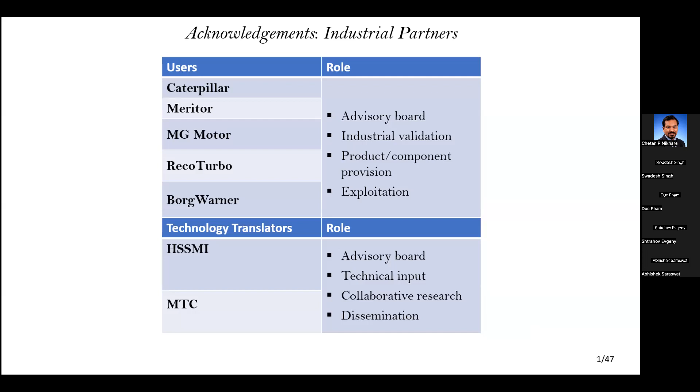The presentation is very simple. It's divided into 3 parts. The main part is the middle one. The first part is only to introduce what we mean by remanufacturing for those of you who are not in the area, and also what we mean by smart remanufacturing. Then I will describe robotic disassembly and our research in this area, which is part of the AutoReman project. Auto is autonomous, Reman is remanufacturing. So that's the end goal of the project, to achieve autonomous remanufacturing. Then a very quick conclusion to the presentation.

So what is remanufacturing? There are many definitions, but we follow the standard definition, which is from British Standard, and it is defined as the process of returning a product to at least its original performance with a warranty that is equivalent to or better than that of the newly manufactured product. So I have underlined the keywords there: warranty that is equivalent to or better than the newly manufactured product.

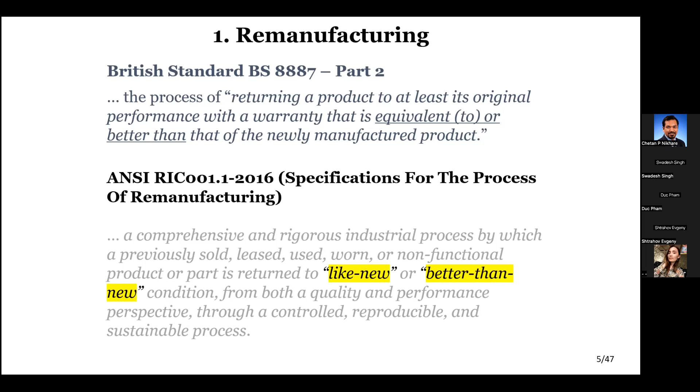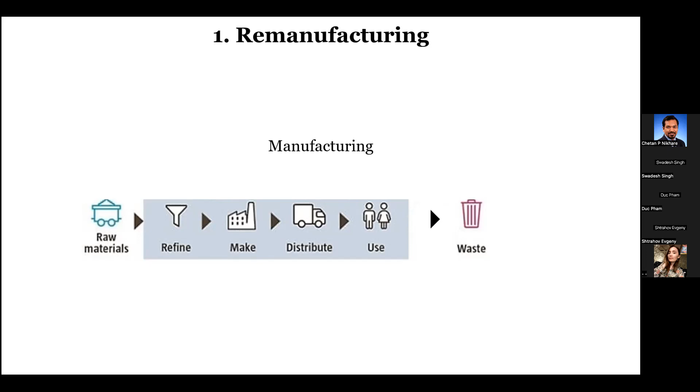So we are all familiar with manufacturing, which is the process of converting raw materials into the product that we use and then we dispose of. So at the end of the product's life, we throw it away. That is conventional manufacturing. Remanufacturing is part of a circular economy where the used product is returned to its original condition or better than original condition, as I mentioned before. There are other loops in the circular economy, but remanufacturing is one of the loops, and it is an inner loop.

So we are familiar with recycling, which is the outermost, and it returns the used product to raw materials. Remanufacturing returns the used product to a new product. So it becomes a new product at the end. And then we have refurbishing, we have reuse and repair.

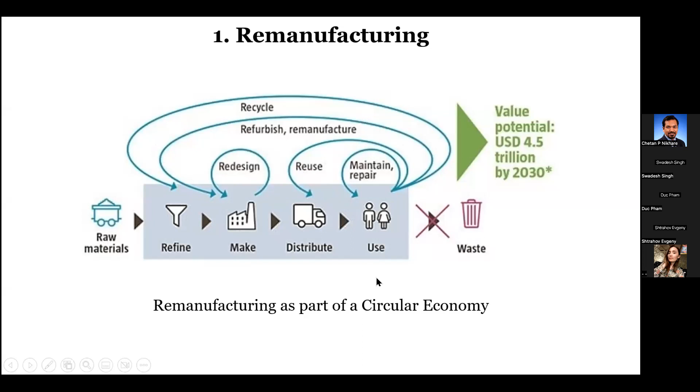Now, looking at the various Re's, repair gives you a warranty, which is okay, but not as good as other Re's. And it does not require as much work as other Re's. Renovating, refurbishing requires a bit more work, or sometimes quite a lot more work, and gives you a longer warranty. Reconditioning, further work and longer warranty. Remanufacturing gives the original warranty, or even better than original warranty, but it requires a lot of work. So this is how remanufacturing is positioned relative to the other Re processes.

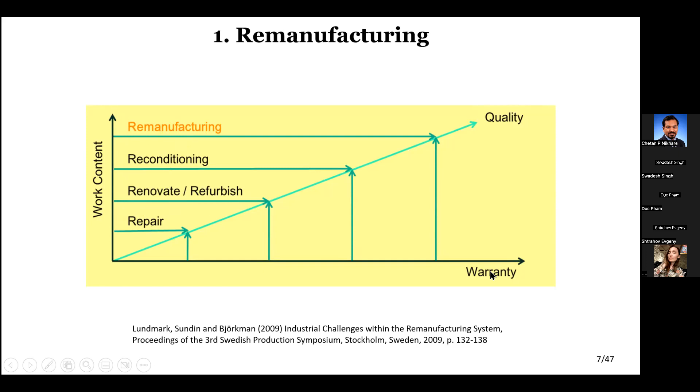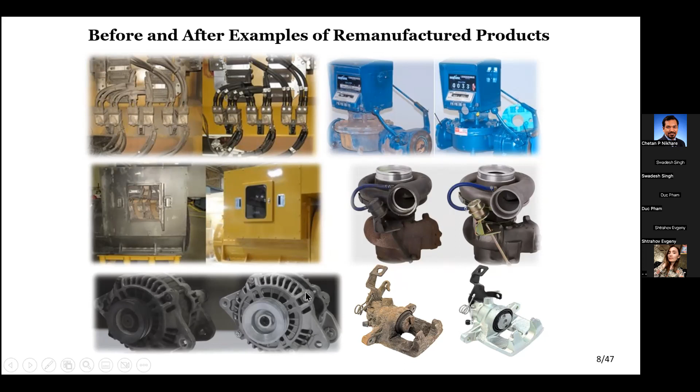So here are some examples of products before and after remanufacture. So this is part of a generator, and before remanufacture it looks old and disused, and then after remanufacture it looks brand new. The same with this flow meter before remanufacture, after; this turbocharger before, after; these brake calipers before and after; this alternator before and after. You can see that externally the products look as new, and internally they also behave like new.

Now, why do we want to remanufacture? Now, most of you are material scientists and engineers. You know about the scarcity of materials. Certainly, quite a few materials are very scarce. And it is very important that we don't waste them, that we are able to reuse them. So remanufacture saves a lot of material. So in the case of this turbocharger, remanufacturing saves 98% of materials. You can use 98% of the materials from a turbocharger to produce a remanufactured turbocharger. In the case of this motor, it saves 88% of materials.

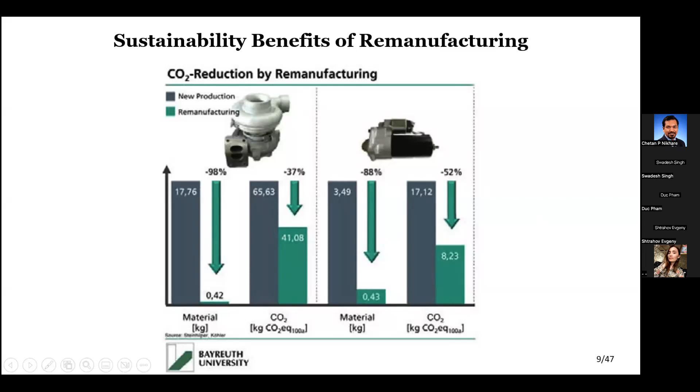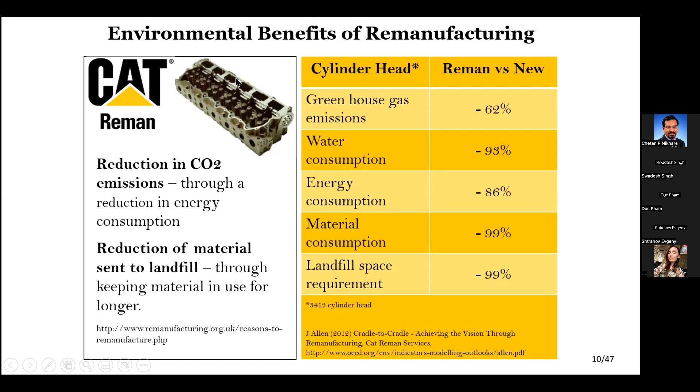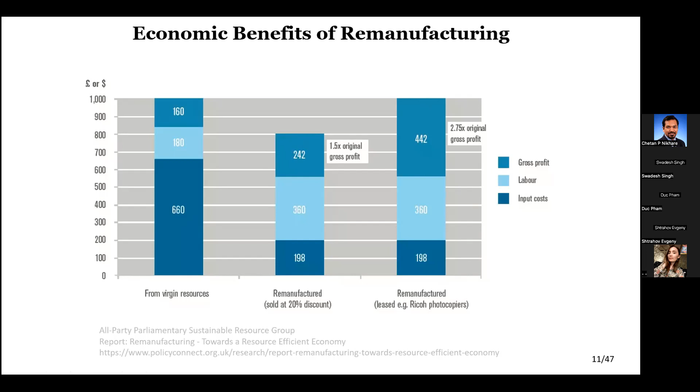So for a manufacturer, it makes a lot of sense. You make more profit. For a user, it makes a lot of sense. You save money, 20%. So everybody wins. The environment wins because we don't emit so much carbon dioxide, greenhouse gases. We don't waste resources. Manufacturers win, as you can see. They make a lot more profit, and users also win. Consumers also win. So it is win-win-win. Now, this is a straightforward sale situation. If the product is leased, the manufacturer makes even more profit, as you can see here. So we see that remanufacturing has environmental, sustainability, and economic benefits.

Remanufacturing also has some challenges. The key challenge is uncertainties, and I will explain to you what they mean. So uncertainties in remanufacturing are to do with supply uncertainties. You don't know what quality of the product you get when you start remanufacturing. So a used product can be quite good or can be very, very poor. So there is quality uncertainty there in the input of the remanufacturing process. The quantities, you don't know how many will be available and when. The quantity and timing are uncertain. Because of those uncertainties, there are operational uncertainties. So you don't know what processing is required for a used product. Some will require a lot of processing, some will require much less processing. Therefore, also the time involved in remanufacturing a product is uncertain.

There are demand uncertainties. At the moment, people are not yet familiar with remanufactured products. They still have queries about the quality of the products—by that, I mean users, consumers. So we cannot guess the demand for remanufactured products.

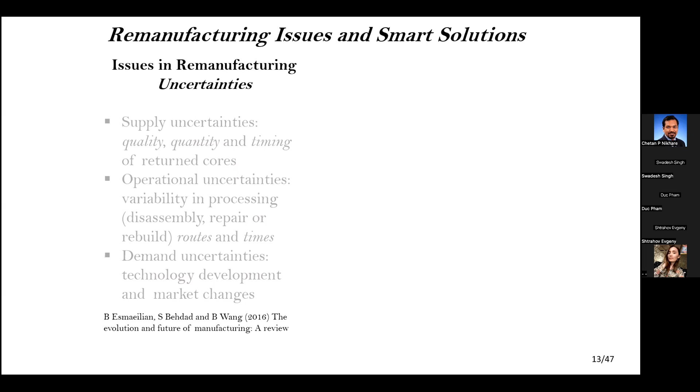So there are many uncertainties there. This information I took from this paper published a few years ago. And in order to overcome these uncertainties, people use sensors, smart sensors. They are embedded in products and used in production systems to reduce the amount of uncertainties that come with remanufacturing of used products.

Using sensors during the operation of the product, you can monitor the operation of the product. By monitoring the condition of the product, you can guess how much life remains in it, and therefore estimate when the product will be available for remanufacture. So you reduce these uncertainties in supply.

You also can record how the product has been used. Because of that, you know what has worn out and what is likely to require which operations. So to reduce all those uncertainties, you also feed back this information to designers of the product to improve the next generation of product. So there are many things you can do to improve remanufacturing and also manufacturing.

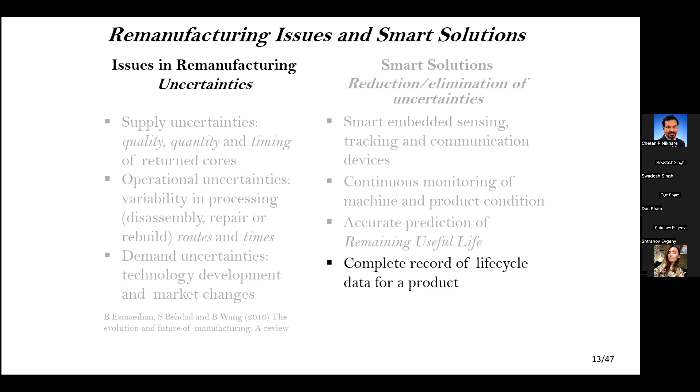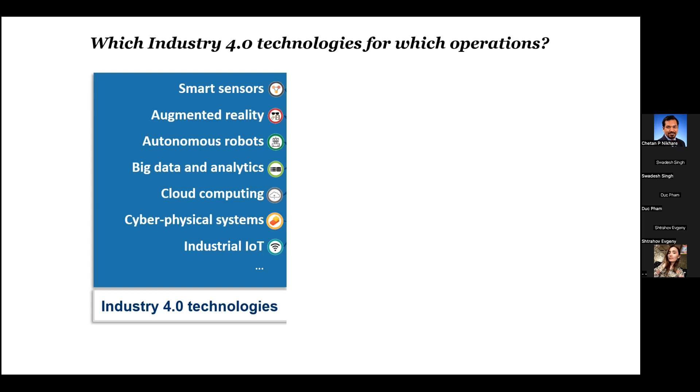Now, these are some of the Industry 4.0 technologies, and they have many uses in helping to reduce uncertainties and in helping to make remanufacturing smarter. So by smart remanufacturing, I mean the use of Industry 4.0 technologies, the use of digital technologies, to reduce uncertainties in the remanufacturing process of products.

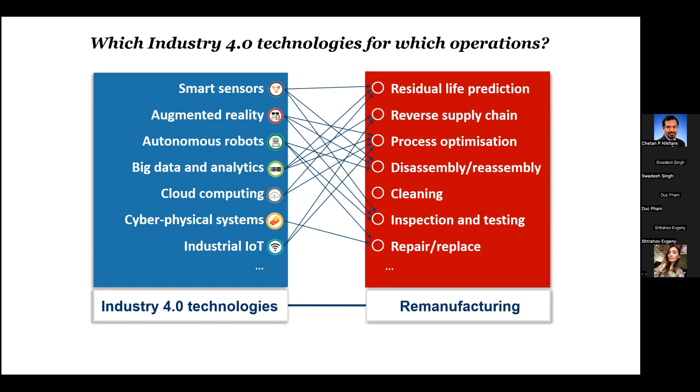So what is remanufacturing in more detail? We start with the end-of-life product, then the product has to be disassembled. This is the first operation in any remanufacturing process—disassembly.

The disassembled product is then cleaned, put through some cleaning machines and processes. The cleaned components are inspected, and those that are good are immediately used. Those that are worn out can either be repaired or may need to be replaced. Then the products are reassembled, tested, and you have your remanufactured product.

Now, at this point, I can explain how the remanufactured product can be better than the original product. When you inspect the product and start to use the components, you can find a new generation of component, and you can replace the old components with a new generation component that might be made of a lighter or stronger material. So in the end, the reassembled product can be better than the original one because it will have some new generation components in it.

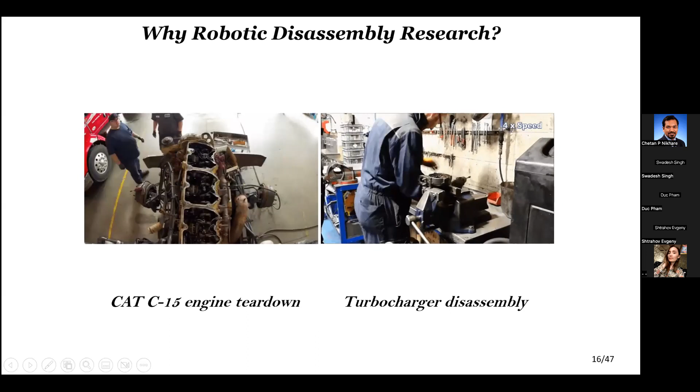It is very labor-intensive. Our work in the AutoReman project is to study the fundamental processes of disassembly, to understand them, and to try and develop systems involving robots and automation in order to perform robotic disassembly—to reduce the amount of labor needed, not to replace everybody, but to replace people where it makes sense to replace them.

There are some tasks that are dangerous. You will see later on—I will mention some tasks that are dangerous and people need to be removed from there. Some tasks that are heavy, boring, and so on. It is also good to remove people and let them do more interesting work.

So our project is devoted to trying to get a fundamental understanding of disassembly processes so that we can devise machines and strategies to perform disassembly in an automatic or semi-autonomous manner. I will explain that in a few minutes.

Now, we are not the first people to study disassembly. People have studied disassembly for 20, 30 years, but we are, I believe, the first people to focus on the fundamental processes of disassembly, to try and derive a deep understanding of disassembly, and then to devise systems and machines to perform disassembly autonomously.

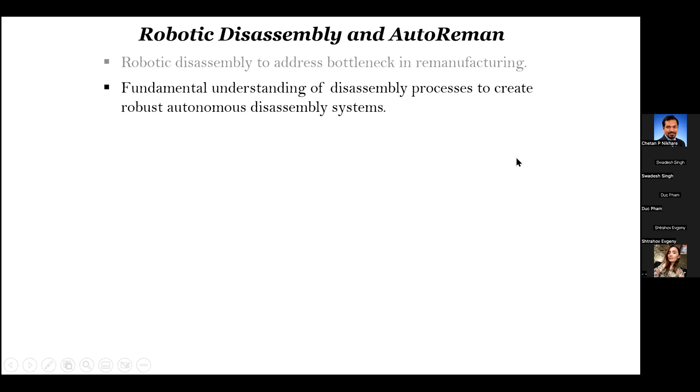The AutoReman project is a 5-year project started in 2016. The end of the project was a year or two ago, but we are still continuing, the team is still working. The funding from the government has finished, but the team is still running and we are obtaining new funds to continue the project.

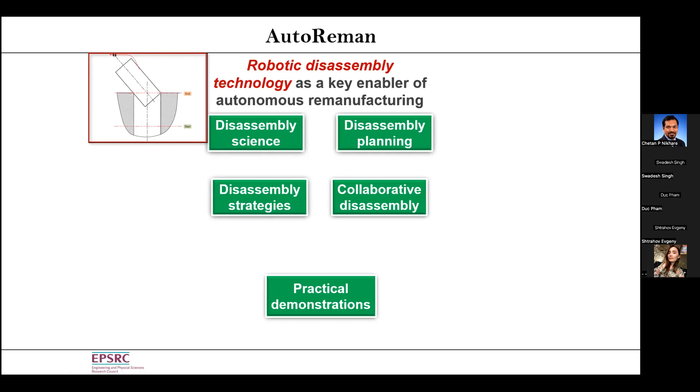We have 5 work packages in the AutoReman project. The first one is to do with disassembly science, which is very important to us. We study fundamental processes, basic processes, like pulling a pin from a hole, like unscrewing, and so on, to try and understand what is involved there. What are the mechanics of those processes? What are the informatics of the processes? What information can we gain from measuring the operation? I will explain some sensor work we have been working on a bit later on.

If we understand the processes, we can design strategies to perform them well, so that the robots don't get into trouble when they perform the operations. If we want eventually to have a system that can work autonomously, then we need to allow the system to be able to plan its operations. So we look at planning of disassembly operations as a big piece of work of ours.

Nothing goes to plan with remanufacturing because of all those uncertainties that I mentioned to you. So the ability to replan when something wrong happens is important. Therefore, we look at planning and replanning.

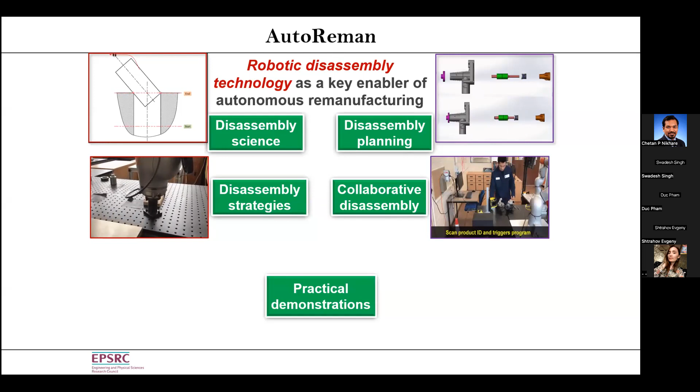There will be cases where a task is either too difficult for a robot to perform, or it doesn't make sense economically for the robot to perform, because you need jigs and fixtures and so on. Humans are much better at handling those processes. Therefore, using humans and robots together is important, and we study human-robot collaborative disassembly.

The final work package is to do with demonstrations. We demonstrate our work in practical case studies. We've done 3 case studies so far, and I'll mention one of them. I'll show you one of them in a short video.

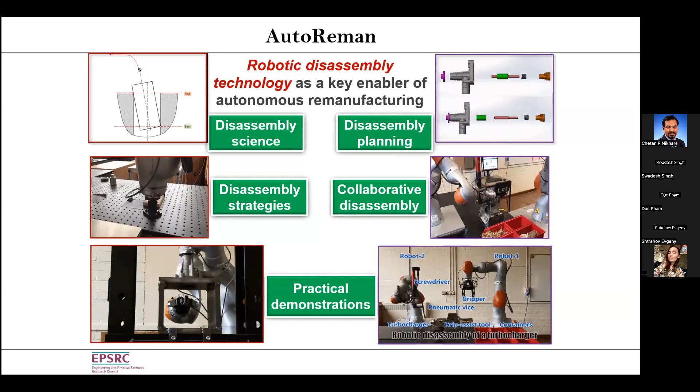Before we started our project, we analyzed hundreds of products. At this point, we have analyzed 438 products. In total, they involved 12,000 operations in order to identify the most common operations. We found that the most common operation was unscrewing.

Then we have separation, which is, as the name implies, pulling things apart, but in directions that are not homogeneous. We have identified one class of operation, which is pulling in one direction, and we have studied this class and also unscrewing in detail. Separation has too many different operations, so we have not focused on separation. We have focused on unscrewing and pulling operations.

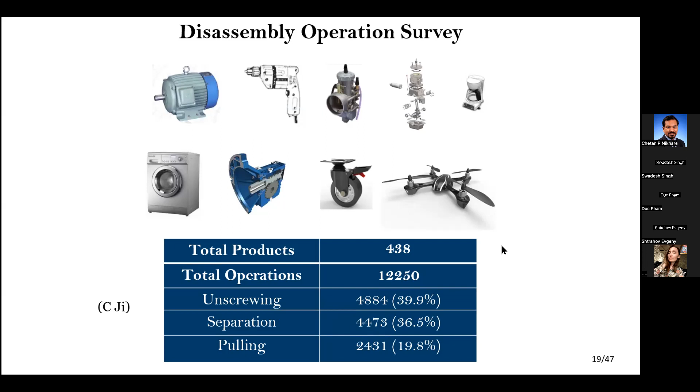For unscrewing, we have devised systems to look at the use of vibrations to enable objects to become undone, for the screws to be unfastened autonomously, so that we don't have to use a screwdriver or a machine to do the unscrewing. By shaking the objects, we can remove the screws.

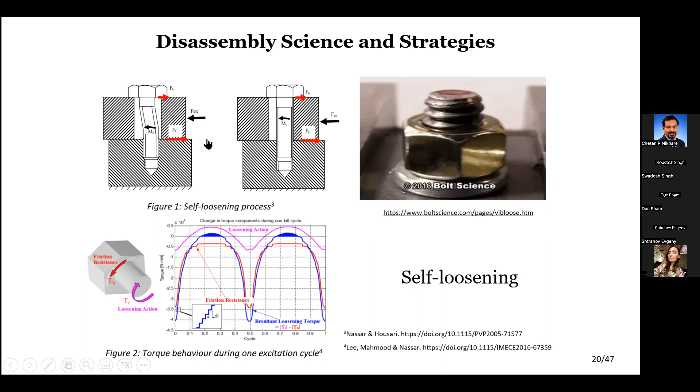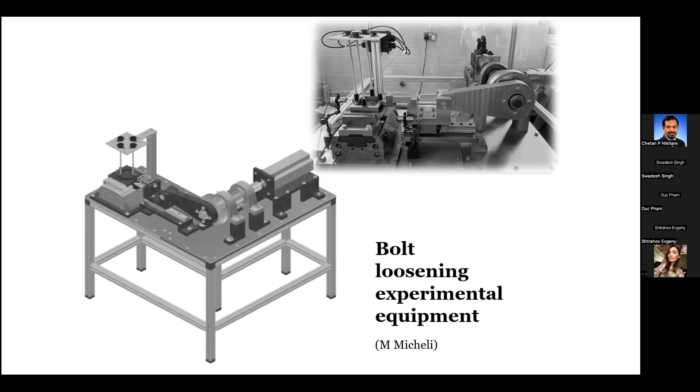Here is the rig that we have designed, and we have used this rig to study how vibrations can cause unscrewing. So we have some results - they take a bit of time to come.

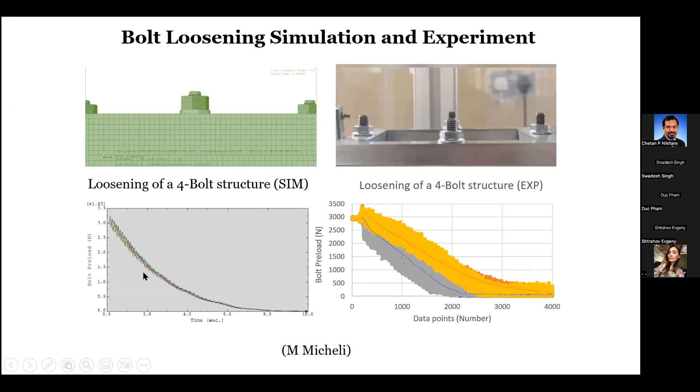After about 10 seconds of shaking, the screws become undone or become loose, and it's very easy then to undo them completely. So we have the rig, and we have simulation results and also experimental results. The experimental results follow the trend of the simulation results. We have built a device to be mounted at the end of the robot arm, and with this device we perform the shaking - the device is being tested. We haven't got the results to show you yet, but here's the device mounted on the robot.

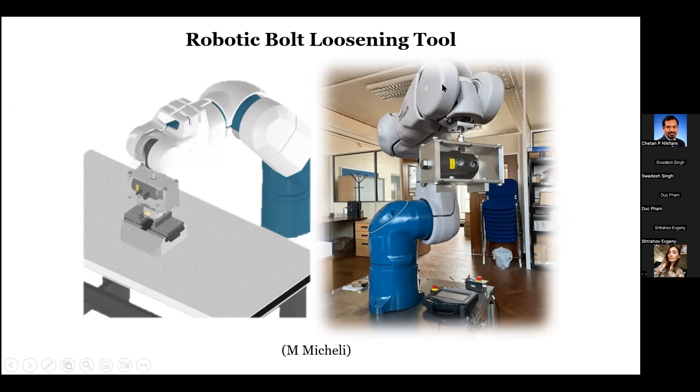One of the uses of the device is not only for unscrewing. The device can be used to impact on an object that is stuck during disassembly. We want to dislodge this object which is stuck, and we have done simulation to show that by performing impacting operations, we can perform the unwedging operation with minimum force on the object. That's the key, we want to preserve the objects that we disassemble. We don't want to destroy the objects because we want to reuse them as far as possible. Or if we don't damage them so much, then the repair operation will be easier and faster.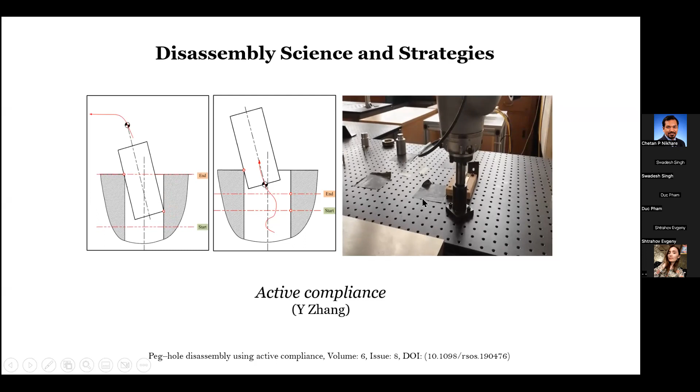In this case, we have the robot equipped with a force sensor to enable it to sense a force and perform a trajectory that avoids wedging of the pin into the hole. Here we show an exaggerated clearance, so you see quite a lot, but in practice the clearance is very small. Wedging can happen if the pin is pulled in the wrong direction. Using force sensing, we are able to avoid wedging the pin into the hole.

Now here is another system which has no force sensing at all. The sensing is done passively. We have springs in the system, and some of you may recognize this as the Stewart platform system, and it has 6 degrees of freedom. It can move up and down, sideways and backward and forwards, and it can rotate about 3 axes. So it enables us to use a robot to pull the pin out of the hole without any sensors. You can see here a 2D version of it, and the pulling out of the hole can happen without any wedging. And this is the device.

Actually, the device was for performing the insertion of the pin into the hole, and this was the device that I designed for my PhD. But now my students are working on this to perform disassembly. Here's a new version of the device, which is actually only a block of rubber with elastic pins, and that enables this shaft to be pulled out of the hole in a compliant fashion, a passive compliant fashion, like the device I showed you earlier. But this is more compact and cheaper to build.

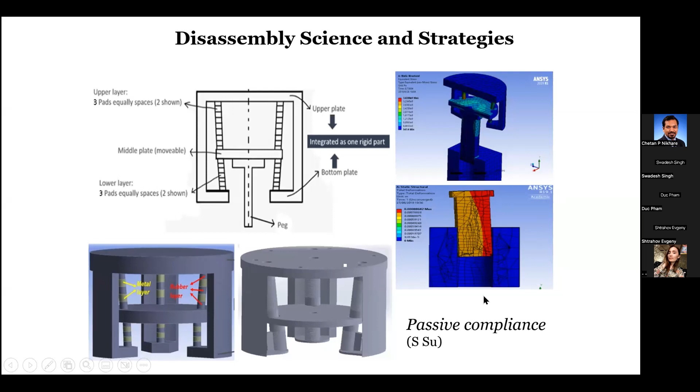If your object is flexible enough, when you pull it out you can wriggle it, like in the case here. This wriggling enables the robot to pull the pin out of the hole without excessive force on the pin. So what you see, the robot is moving sideways, doing a bit of wriggling in order to reduce the pulling force. On the left-hand side, the robot just pulls out the pin and needs a lot of force. On the right-hand side, it needs less force by wriggling the pin. This is another strategy, and I think we've all come across it. When we pull something out and it doesn't go out straight, we wriggle it and we can move it out. We studied this in theory, we've done simulation, and here's the practical implementation.

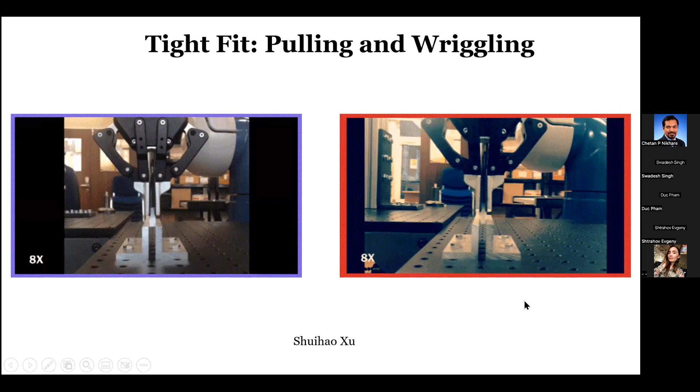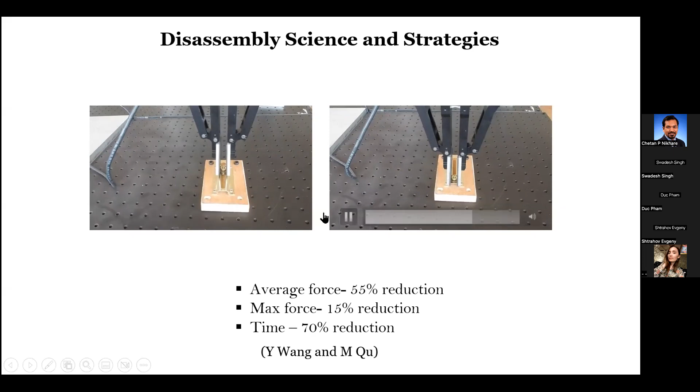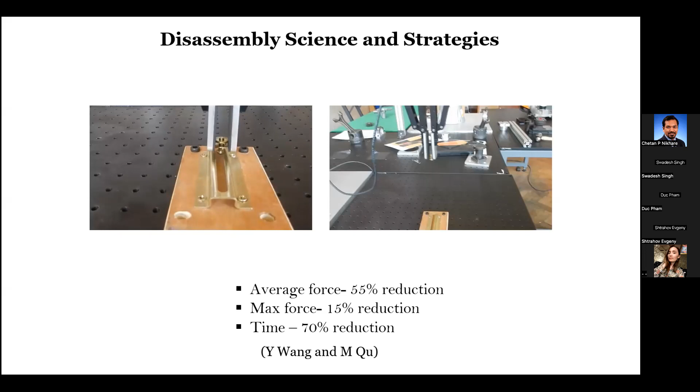We don't just study pulling pins from holes. Here we slide something, another operation, sliding. You notice the robot on the left-hand side started before the robot on the right-hand side, but the robot on the right-hand side finished first. The secret here is that the robot on the right-hand side does a bit of vibration, very small amplitude vibration, and this again helps. So vibration and wriggling both help in the case of disassembly. Finally, the robot on the left-hand side succeeds, although it started quite a lot earlier.

We have also enabled robots to learn disassembly operations. Here is learning using a strategy known as reinforcement learning. With reinforcement learning, the robot learns to maximize a reward. At first it doesn't succeed, but by going in a certain direction, the reward increases, so it continues to go in that direction, and finally it will succeed to move the pin along here without being told how to do it. The robot was able to do it.

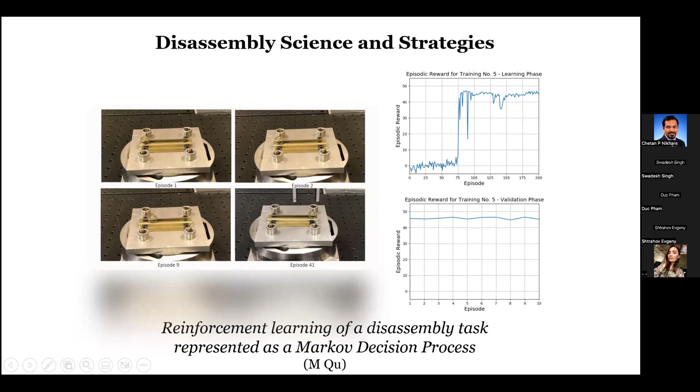After a number of episodes of learning, I mentioned planning. Here is an example of planning. We have a water pump made up of 6 parts. It can be disassembled in different ways. This is one way of disassembling the pump, and it requires a number of steps. This is a second way of doing it, and it also requires a number of steps. Then the third way of disassembling the pump is this one, and it also requires a number of steps. The number of steps in the third case is shorter than in the first two cases. Now, this is a simple pump, so for a simple product you save 1 step. In a large product with many components, if you have a good plan, you can save many steps, and therefore save time. So this is why people want to do optimal planning of disassembly.

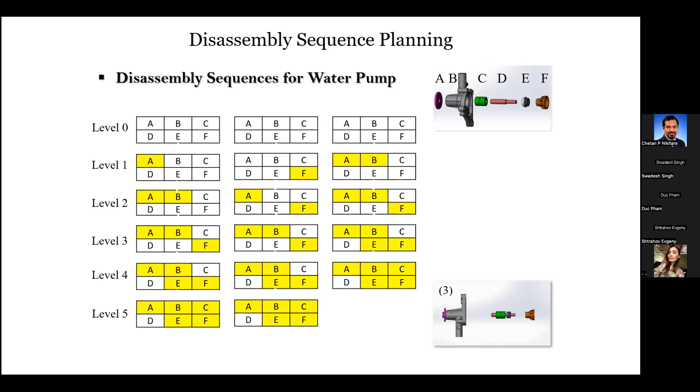I could spend hours talking about disassembly planning, but we don't have time. If you are interested, there are books that we have written on the topic. There's a whole book on disassembly planning for remanufacturing, and there is a book on using the Bees Algorithm, which is something we developed in our team—an optimization method to perform planning, or to solve any optimization problems. The books are available now, so please have a look at them to find out more about our work on disassembly planning and optimization.

As you might remember, one of our work packages is to do with human-robot collaboration. Our focus has been on applying techniques for using humans and robots together, and demonstrating those techniques. Why do we want to do it? Because of these points: sometimes jobs are too difficult for humans to do—jobs that are heavy or dangerous—so we use robots. Sometimes jobs are difficult for robots to do, so we use humans. We do this to achieve economic advantages, because for low volume and high variety, humans are certainly much better than robots. Sometimes you need special jigs and fixtures, and again it's much better to use humans because jigs and fixtures cost money. Then there's social motivation—you want to remove people from hot, dusty, noisy environments, and so on.

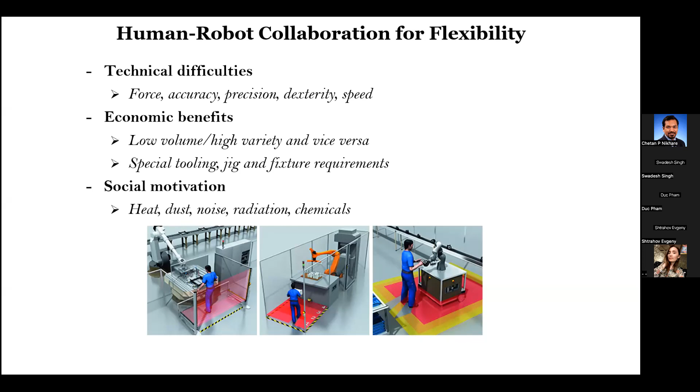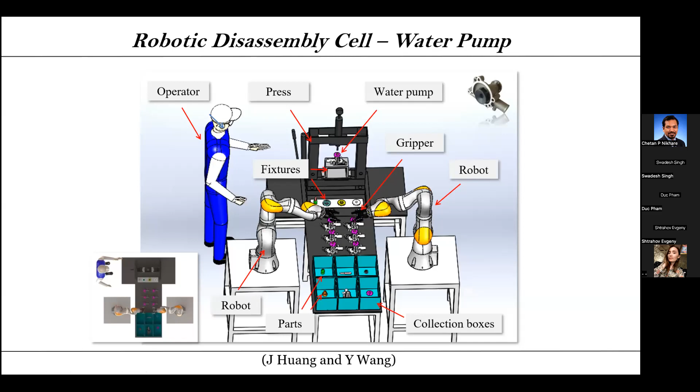Now we have some demonstrations. The first demonstration we have done is the disassembly of the water pump that I mentioned earlier. We have a human and two robots and a press, and the press is a manual one. We just want to illustrate how we can combine people and robots together, so this is an artificial situation. In practice you probably won't use a human to operate a press—you would use a mechanized press. But here we just want to show that robots can help people.

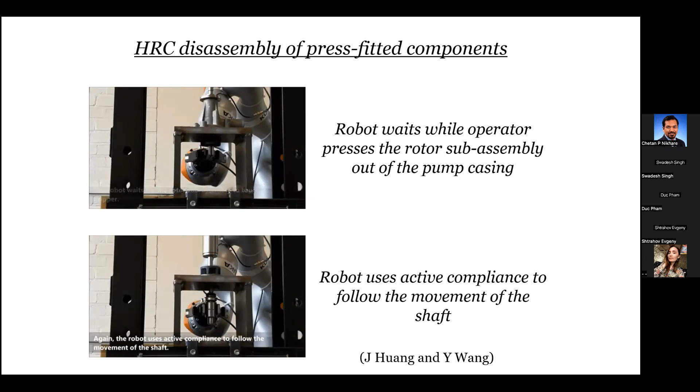You can see here, the robot picks up a part, takes it to the press, the person operates the press, and the robot acts like the third hand of the person. It catches the part as it comes out of the press so that it doesn't fall down—if it falls, it can bend or break. The robot uses its force sensor, grabs the part, and follows it as it's being pushed out of the female component. The part is grabbed properly and put down properly. This is possible using a collaborative robot that can follow the action of the person in a compliant manner—it grabs the object and follows its movement. We did not program the following; it is done by the robot sensing the force. This is the capacity of the robot itself.

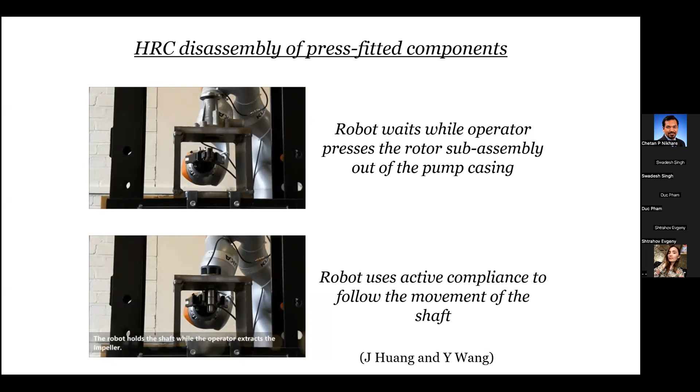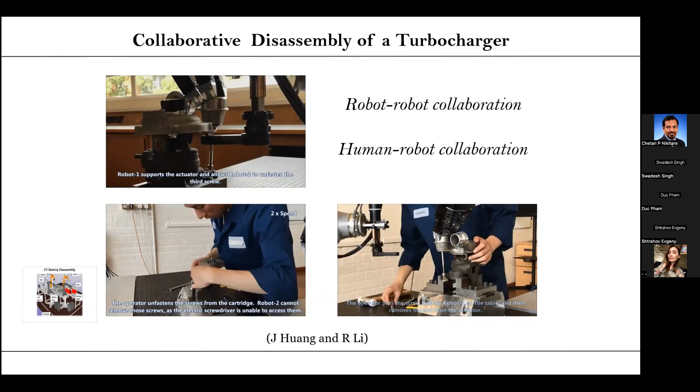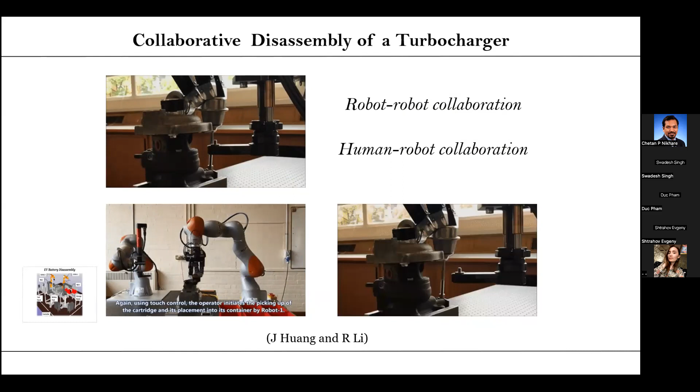Then we have a second demonstration, where we use two robots and a person again to perform the disassembly of a turbocharger. You can see the person performing a manual job and the robot performing unscrewing also. The person does unscrewing too, because due to the access, it's difficult for the robot to get into a tight space, so the person gets there and does the operation. I have the whole video to show you—it takes only a few minutes—and I hope you will see what we mean.

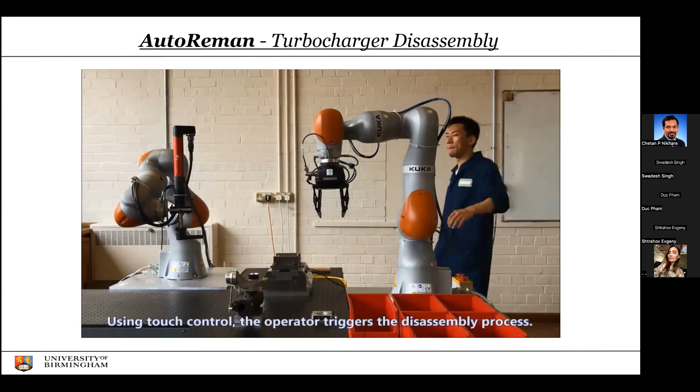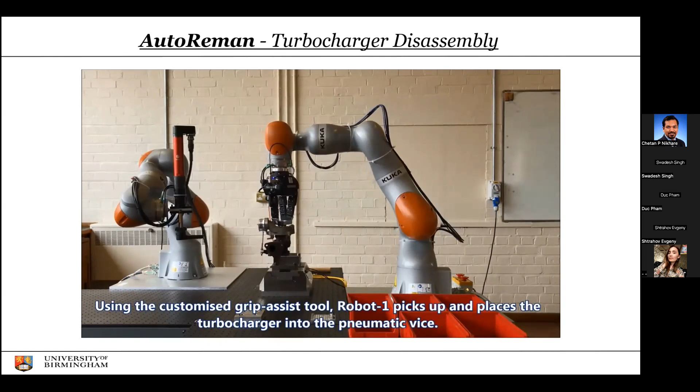So that's the turbocharger. This robot goes in and does the unscrewing. You can see the unscrewing operation.

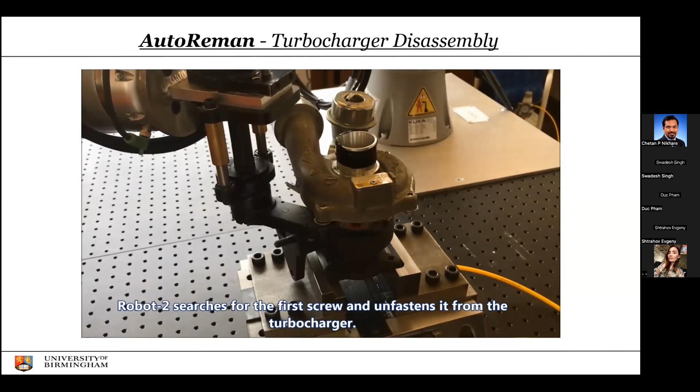Now, because the position of the screw head is not precisely known to the robot, it has to search for the head. You will see in a minute the search operation performed by the robot. You can see here, it's searching for the head, and it uses its force sensor to do the search operation.

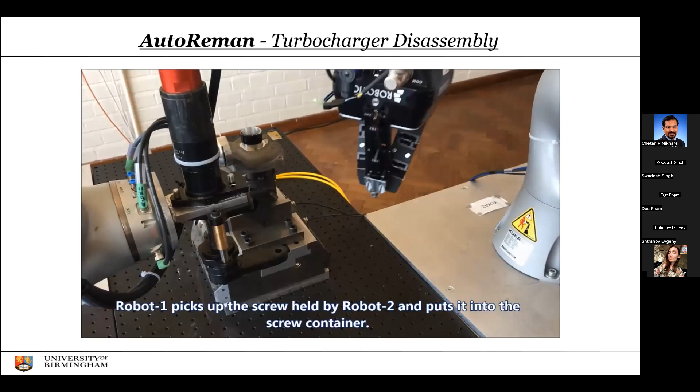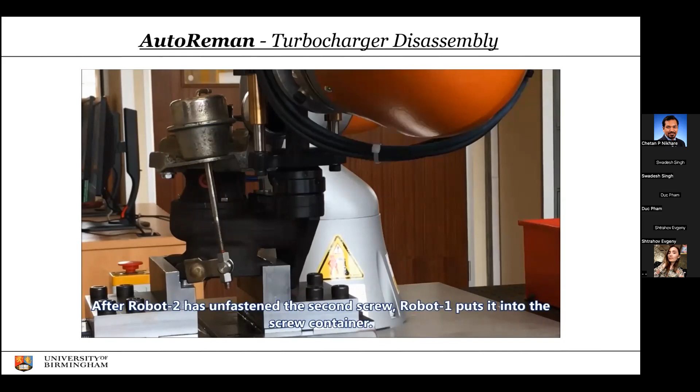Yeah, the search operation is clearer here. Right, it's found it now.

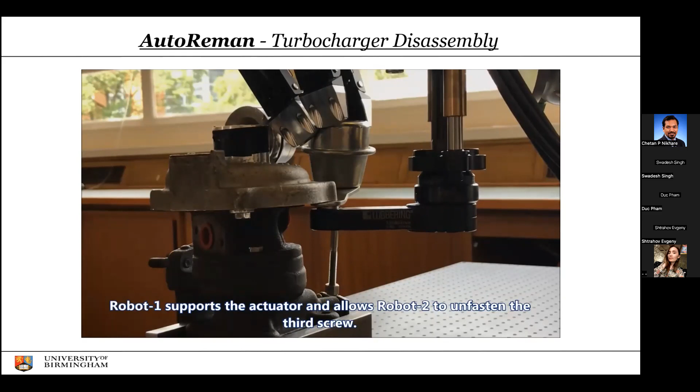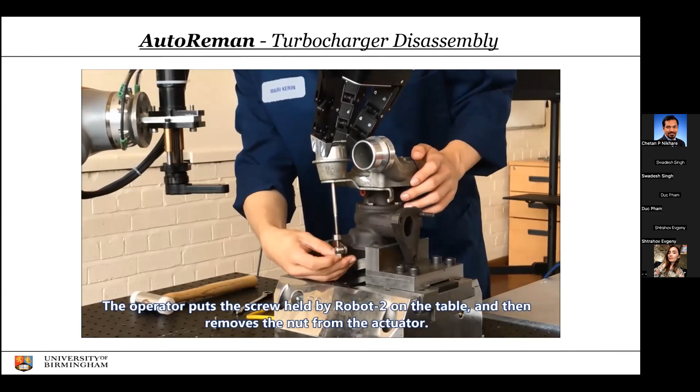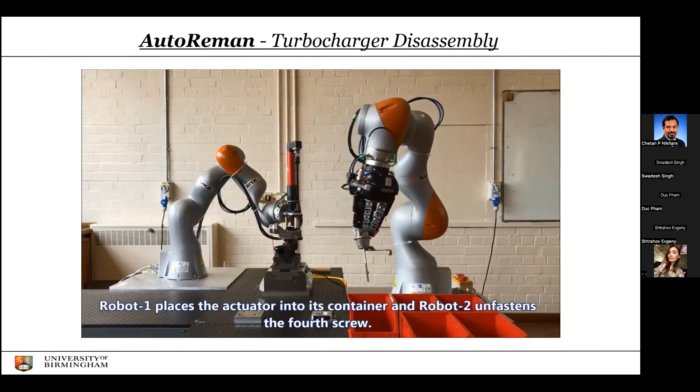Now the person comes in to help. More unscrewing. Now the person has to come in and help because this is not easy for the robot to do this operation.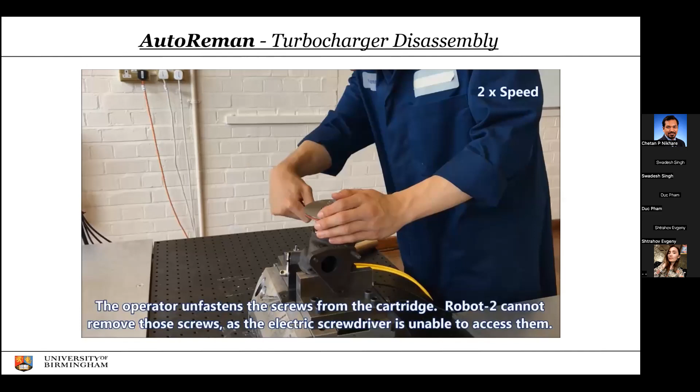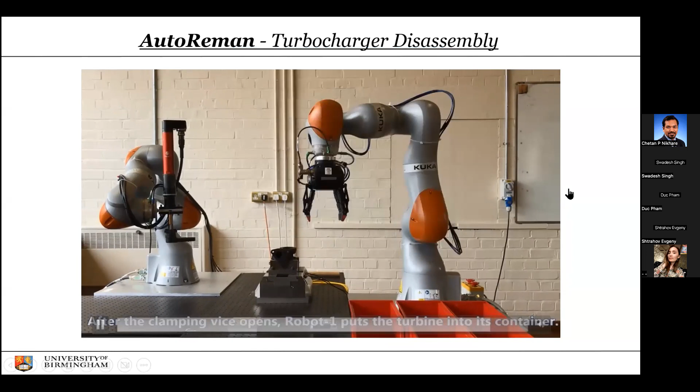Oops, I wanted to move. So this is now our third demonstration. In this case, humans are not wanted here because the task is very dangerous. It is a disassembly of a battery, a car battery. This is a hybrid car battery. It is not too big, but it's still very dangerous.

So we use 4 robots. In this case, there are no humans involved, and we've built a system. The demonstration is too long to show. I will show only bits of it.

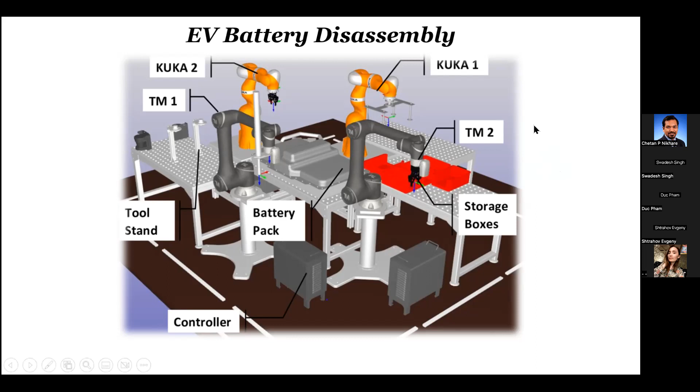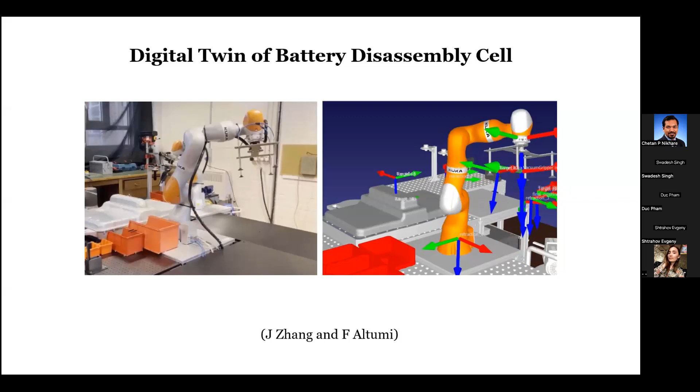For our work, we also look at digital twins. We have a digital twin of an operation here, showing the robot and the twin performing the movement of the cover of the battery. This is clearer. You will see the twin and the robot performing a particular operation.

Just to show you that it is a real twin, we will see later on a person moving the robot and the twin following the movement. After this, you will see that demonstration.

Yes, the person moves the robot, and the twin follows the movement. So it's a real twin now.

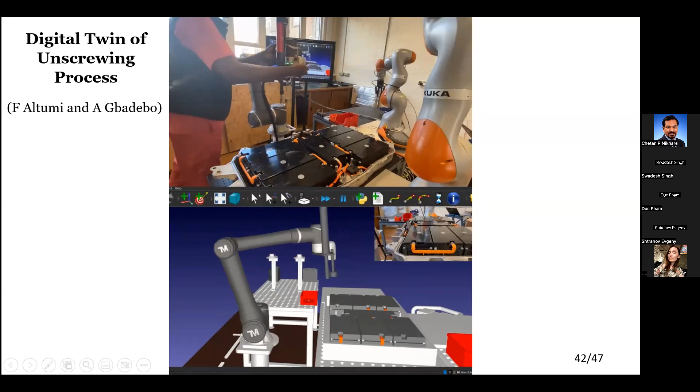Here's another bit of the operation. The robot using its vision sensor. So here now we use a vision sensor to locate a cable, and then it comes and picks up the cable.

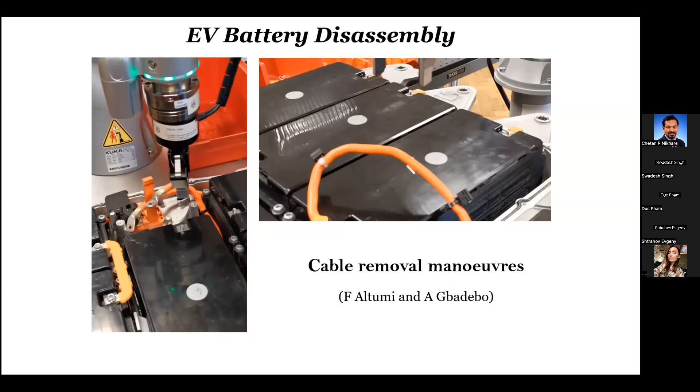It pulls it out. But the cable is stuck. So it has to find a way to remove it. It looks for the cable again.

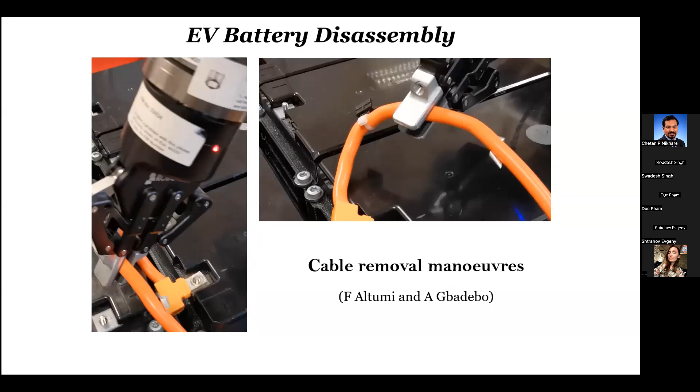We have not optimized the system for speed. We just want to show that things can be done. So you focus on the movement now. Wriggling happens here in order to remove the cable. The robot is able to sense whether the cable is off using its vision and force sensor.

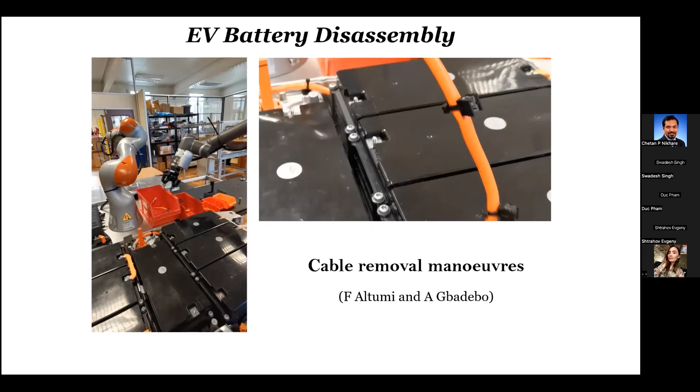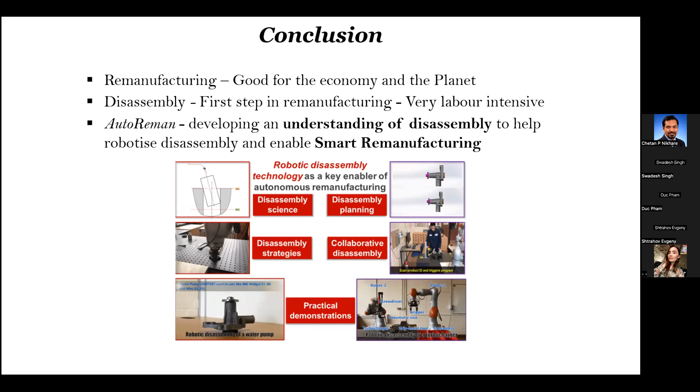In conclusion, remanufacturing, we have seen, is good for the economy and the planet. Disassembly is the first step in remanufacturing, and it is very labor intensive. Our AutoReman project is focused on developing an understanding of disassembly to help us design systems to perform robotic disassembly and enabling smart remanufacturing.

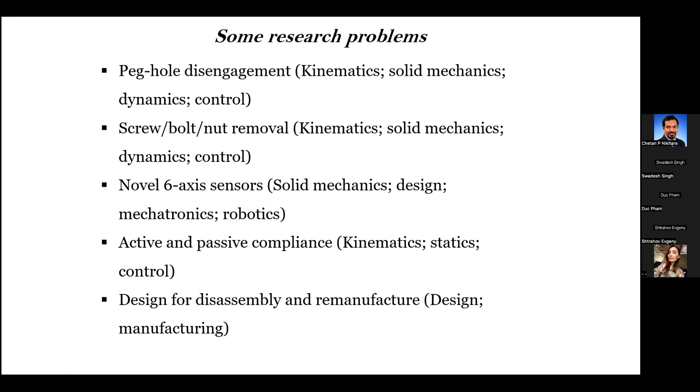Just to illustrate for you, the peg and hole problem that I studied many years ago has now become a topic in Science Direct, with many people publishing in this area. The problem was investigated first in the 1960s, and even in 2023, people are still writing about this peg and hole problem.

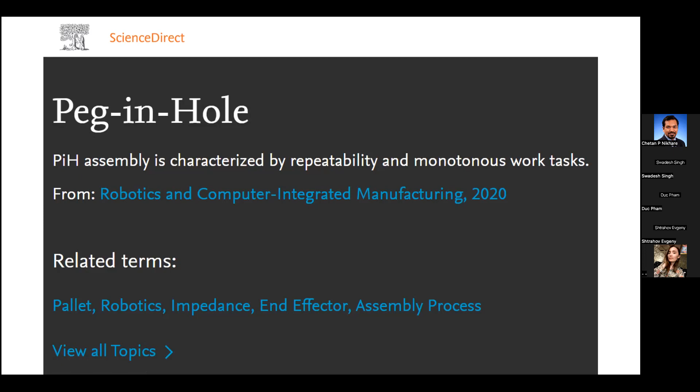We wrote our first paper on the peg and hole problem in disassembly 2 or 3 years ago. I'm sure in 10, 20 years time, people will still study that problem. There are many things for us to do in this area.

As the EU Commissioner for the Environment said, with the circular economy, we are looking at a triple win. I mentioned the triple win before. Society can win, businesses can win, and the environment can win. It's a major opportunity, and we need to make sure that we grasp it.

And we can't do it on our own. We need help. You are very welcome to join us to work on this topic of autonomous remanufacturing and robotic disassembly. Thank you.